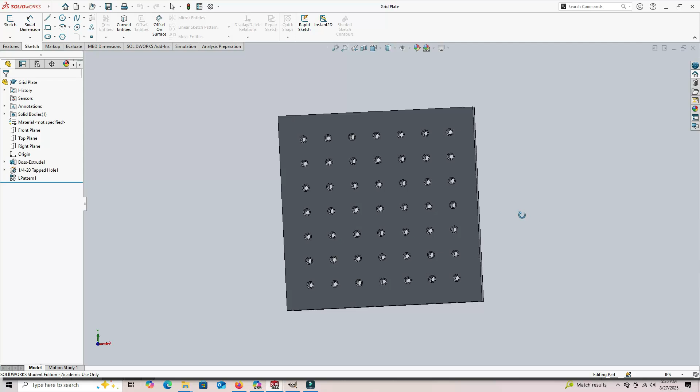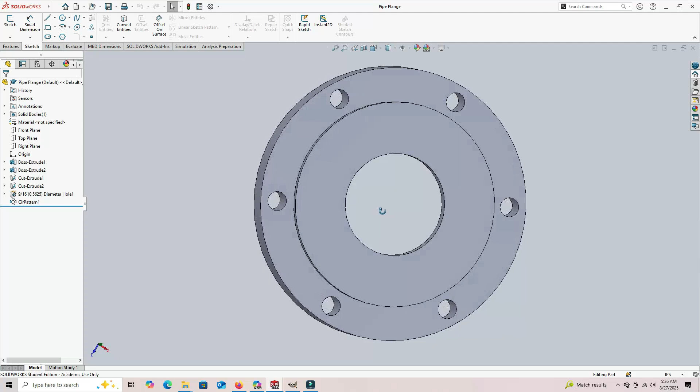Today I'd like to talk about linear and circular sketch patterns. This allows you to take one feature you've drawn and put it all over a piece in some repeating pattern, such as on this grid plate, or bolt hole circles like this. It's a fantastic tool, I use it all the time, and it's really quick to learn.

So let me show you how we start these parts from the beginning. I'm going to go back to our grid plate I showed you a second ago, come to my fresh sketch, and choose a corner rectangle.

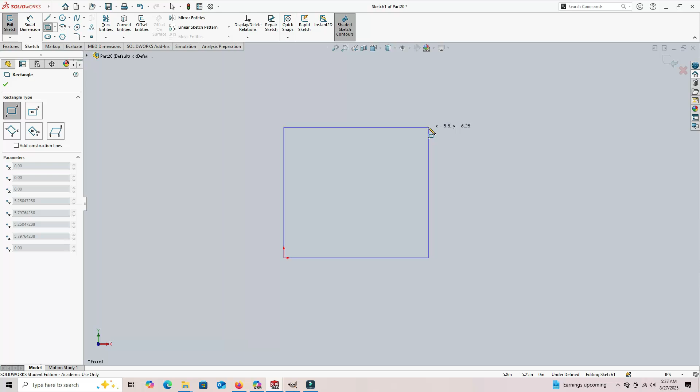I'm going to snap to my origin and come way out here. Actually, let me show you a quick thing. Let's say I make this about that size. My square that I actually want is 8 inches square, and this is coming in at a little over 5 inches. If I just type in 8 inches when there's a really large difference between the two measurements, it tends to keep the same aspect ratio on the part. So if you're way off on your scale, it really doesn't matter.

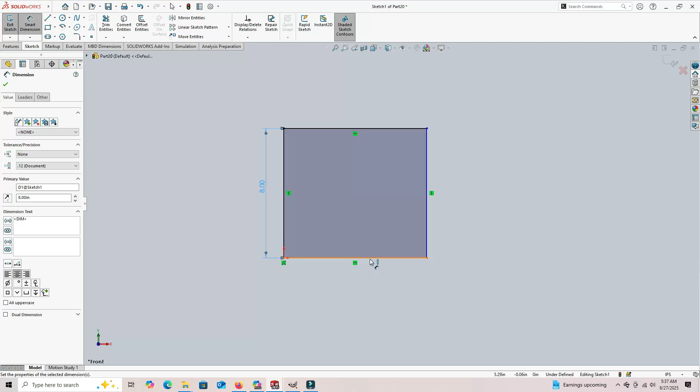And I'll come back down here and say 8 inches there as well.

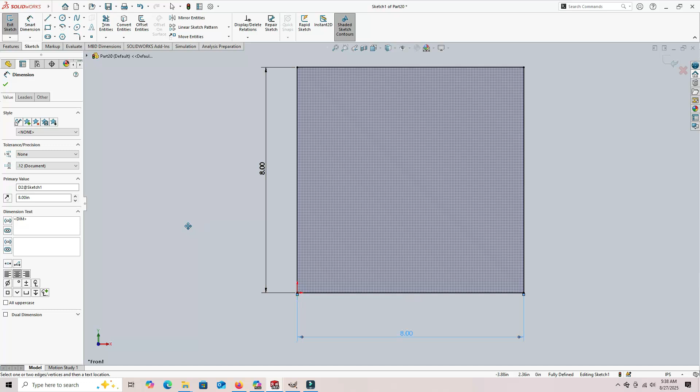Now, I've shown that you can pivot using your scroll wheel. I'm going to get normal to that view again using my orientation view. One thing I didn't mention in my first video is you can hold down the control key and click your scroll wheel, then drag it around in just one plane. So I can pivot it, or drag it in one plane. That's not important to this particular thing, I just thought it needed to be covered.

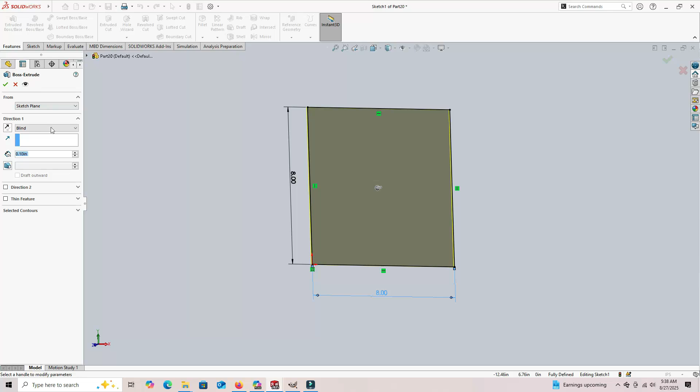Now I'm going to come in here to extruded boss base, and I'll make that 1 inch thick. That seems like a decent size. I don't actually remember what I put in the other one.

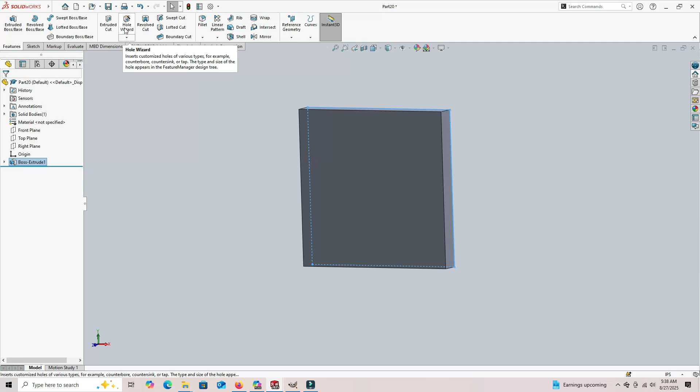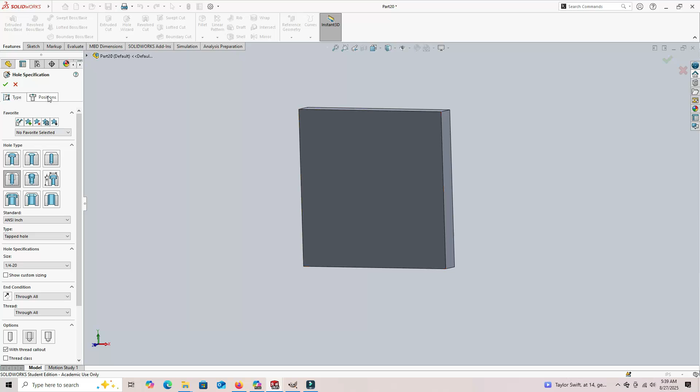Alright, now let's move on to the pattern part of this. First thing I'm going to do is use the hole wizard to put a single hole onto this face, and make that a tapped hole. There we go, we'll call it a 1/4 through all. This is everything we covered in the last video. I'm going to come to positions, and click that face.

I could easily put all 49 of the holes I had drawn on that grid plate onto this piece, but I could also save myself a lot of time having to dimension and place each of those 49 holes by just doing this linear pattern.

So I'm going to use my Smart Dimension tool and place the first hole 1 inch in from each edge. Now when I click the green check marks, I end up with my one singular hole.

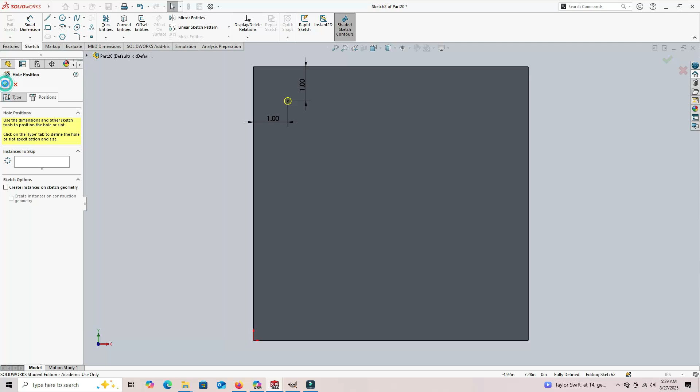Now I can come up here to linear pattern. This is also in the features tab, the standard interface just like I was in the last video. So I'm going to come up to the linear pattern. It asks for spacing.

In this case, I want the dimensions to be 1 inch in between. It's defaulting to the number of instances that I had last time, which is 7. And it's asking for direction, so you can click features, faces, or even planes to get this.

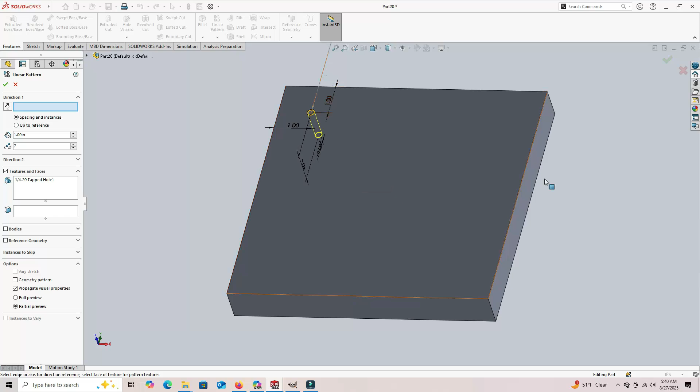This bit is a little confusing at first, because if I were to click this face, it would put my linear pattern going up off of that face. So what I really need to do is click this face here, and you can see it spreads out my holes in that direction. And then you also have a direction 2.

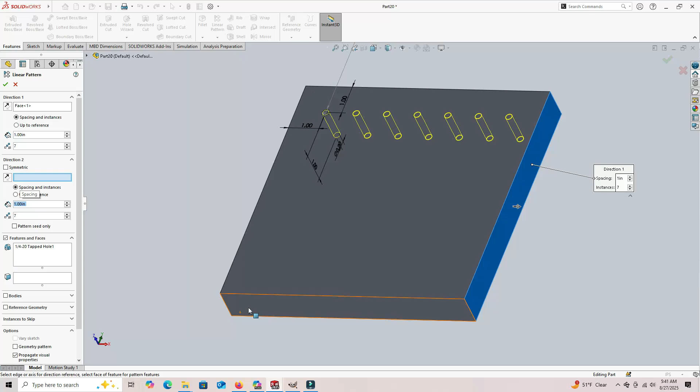So you can choose a separate spacing here. In this case I want a grid, 1 inch spacing just like up here, and 7 holes so I'll have an even spacing. Now for direction 2, I choose this face, and it will put all of my holes there.

Now there is no doubt in my mind that this was way faster than laying out all 49 of these holes and having to use Smart Dimension to put each one in its place in the hole wizard. I don't think anyone can argue about that.

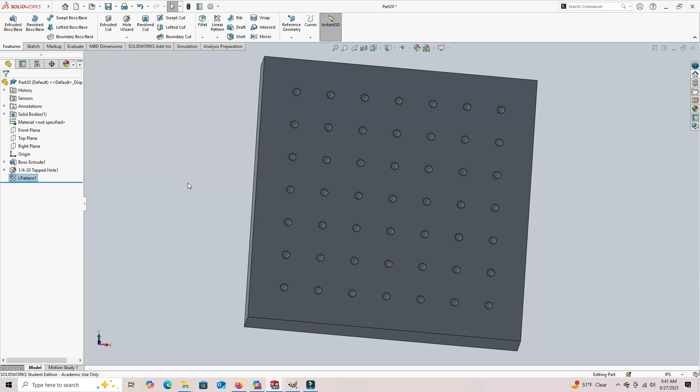If we look at my other part, the pipe flange, I want to point out a couple of other little things that might get buried in this video. It's not just about the hole wizard and the circular pattern in this case.

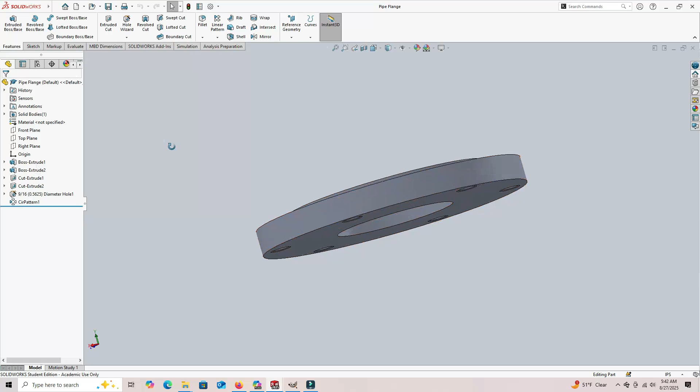I drew this part, as you can see from the tree, as several different extrudes. So I have my first one that shows the body of the flange, then there's this little boss that, if this was actually a pipe flange, would usually fit inside of a mating part to locate it and keep it from slipping around. Then I had a cut extrude to do the hole in the middle and a slightly larger cut extrude to do this recess.

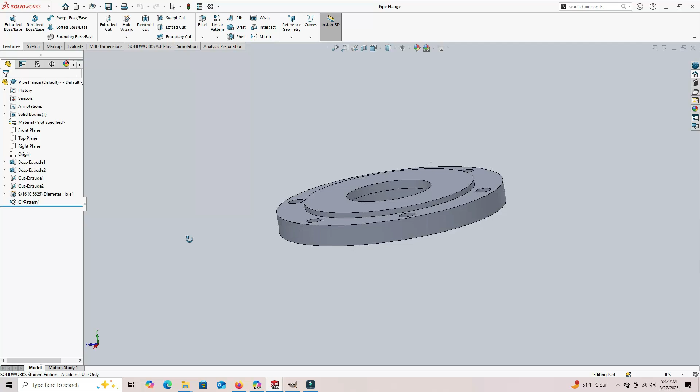And then I've got my hole that I did in the hole wizard and the circular pattern that you're going to see in a moment. Let me open up a new file, and I'm going to show you a slightly different way that you could do this.

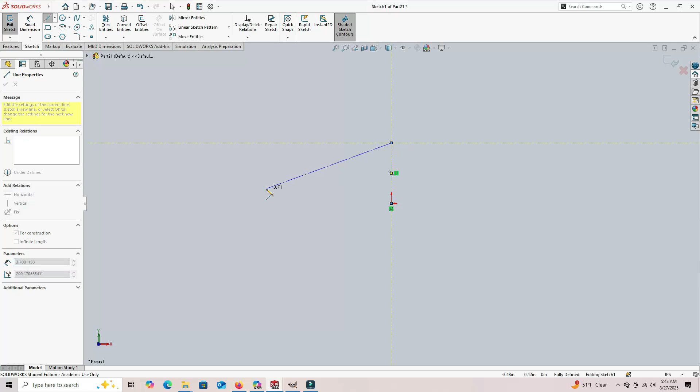So I'm going to go to my Sketch tab. I'm going to click Sketch. We'll do this on the front plane, why not? First thing I'm going to do is click the drop down next to Line, and I'm going to put my center line, just drawing it right about there. Hit escape to get out of that.

Center lines do not have to be fully defined, so I don't have to worry about that little blue dot up there.

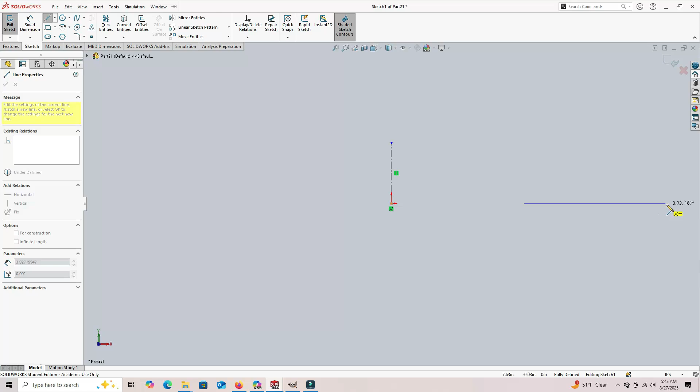So now I'm going to do the rest of this as a revolve. I'm going to start down here, and I know my part is probably going to be something shaped like this. I'm doing this pretty quickly because I don't have to be very accurate here.

This is what it looks like in cross section, and then I can Smart Dimension everything from these lines.

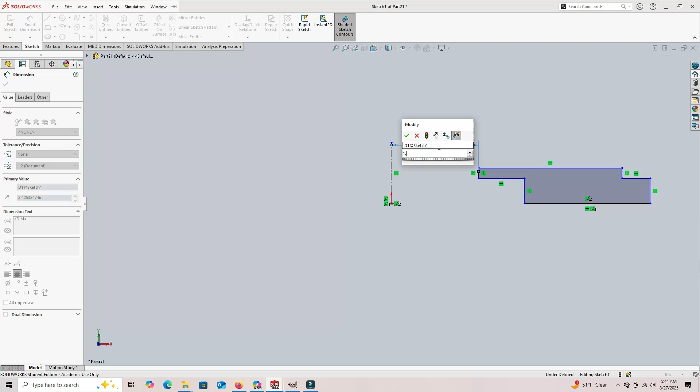So I know that, for instance, that feature on the radius is only 1.5 inches away from the center. That was a 3-inch diameter cut. This one was 3.5, so that would be 1.75 inches on the radius. This one up here was 6 inches, which I know is 3 inches. I don't have to do any complex math for that.

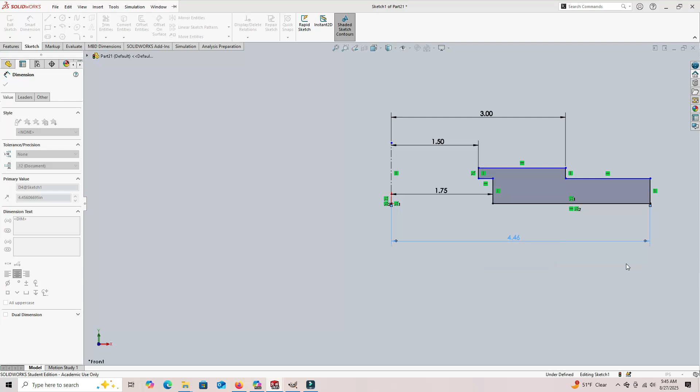If I did have to do some complex math, I know that this one's 8 inches, but if I didn't, if it was some oddball number like 8 5/8, I could type in 8.625 divided by 2, and it will do my math for me. You can actually get pretty complicated in the math. You can even add parentheses and all sorts of stuff. You can type in any math formula in there, as far as I know, and it will do the math for you.

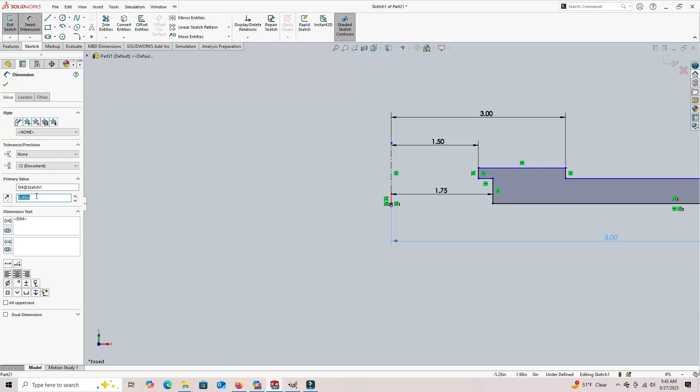I don't want that to be 8 5/8, though. I want it to be just 8. Oops, nope. I want it to be 4 inches.

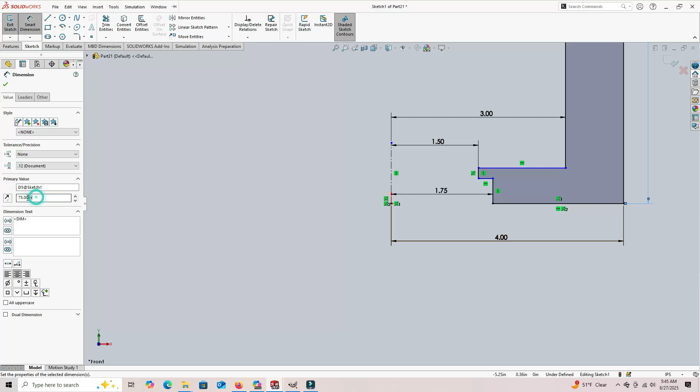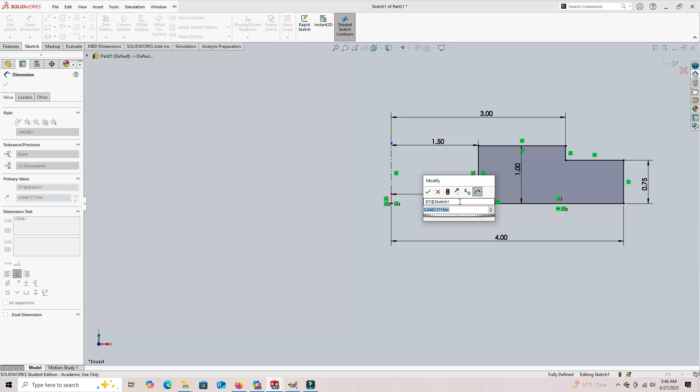So then we also have, let's see, I don't remember what I used for my dimensions here. I'm going to say that's 3/4. Oh, not 75 inches, 0.75 inches. There's a big difference there. We'll make this one 1 inch. And then, let's see, we'll make that be 0.75 as well. There we go.

So like I said, I can tilt this around, or if I wanted to, I could click my control key and drag it all in one plane. This is very handy to recenter the drawing on your sheet here. So I could really just drag it anywhere I wanted to, even down here where your like and subscribe buttons would be, I think.

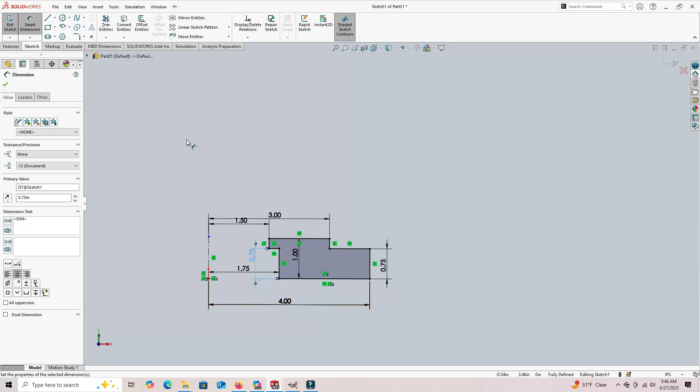Anyway, let's go ahead and go to Features. I'm going to click Revolved Boss/Base, and it's going to assume I want to use that center line.

So now I've got my whole pipe flange, really zoomed in, and I only had to do one operation instead of four different operations. I had one extrude, two extrudes, and then two different cuts for these guys.

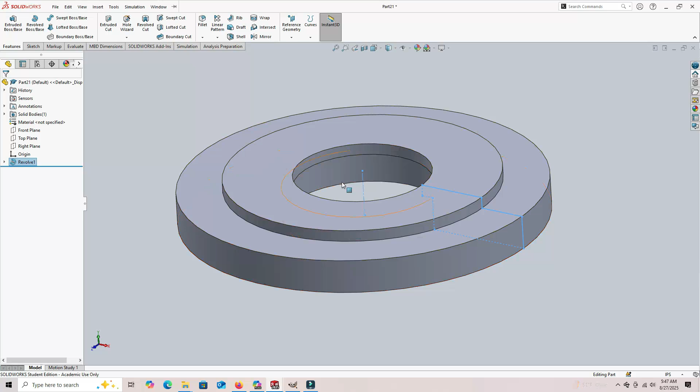Now I'm going to put my hole in here with my hole wizard. I just want a regular hole, and a lot of this is already carrying over from when I made my sample part. I want it to be 9/16 of an inch in diameter, which would be a clearance hole for a 1/2 inch bolt. I want it to go through everything.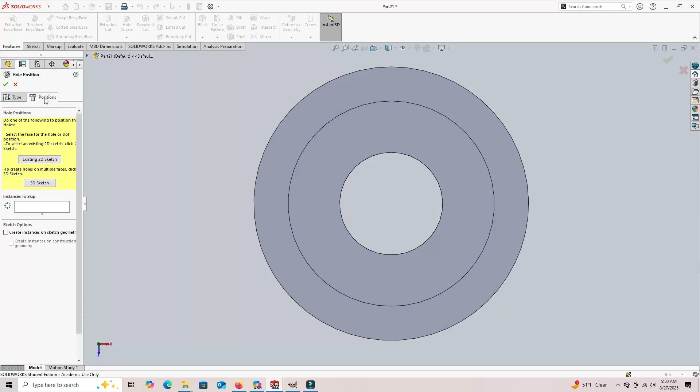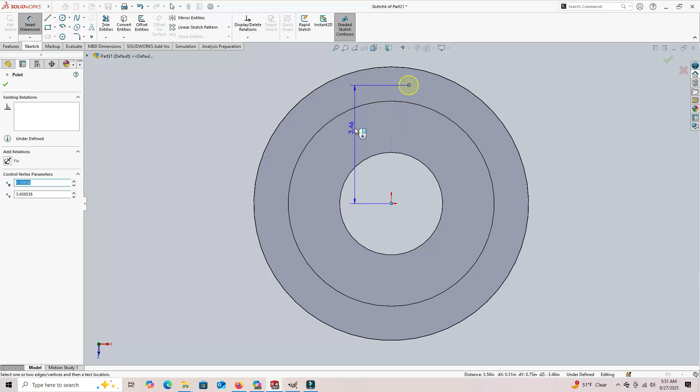Now I can go to Positions. I'm going to choose the face, and rather than snapping it vertical over the origin, I want to show you something—I'm going to put it a little off center, and the reason is because of Smart Dimension. Everything has to be oriented to the origin, and I know this is going to be 3.5 inches up that way. But when you snap something to the origin, it's difficult to put in the second orientation because there's no distance between the origin point and the point where your hole actually is. So I usually put it a little off center, then drag my mouse down and get this measurement, and from there I can just type 0. Then it'll snap it above the origin, nice and centered.

That's something a lot of people fall into—that little trap of snapping it right above the origin, and then they get into a pickle because they can't fully define the sketch at that point.

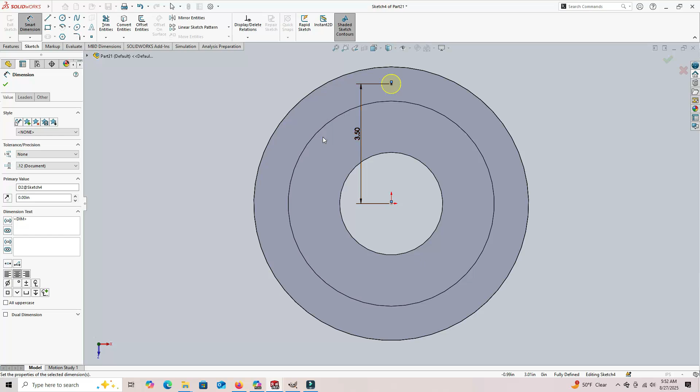So now I'm going to go back—actually I need to click my green check marks. It's going to give me my hole. There it is, yay.

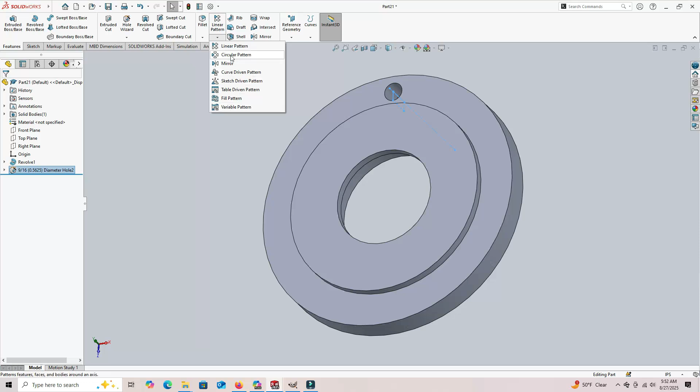Then I'm going to choose this again, and go to the drop down under linear pattern—you have all of these options. The one I want this time is circular pattern. It's going to assume you want to make the pattern out of the last feature you made. If you want to choose something different from the tree, you could come up here and choose whatever feature you want. It's also going to ask how many degrees you want to move around in the pattern. In this case, I want 360 degrees and 6 instances, left over from when I made my sample part. Up here, it's asking for the direction.

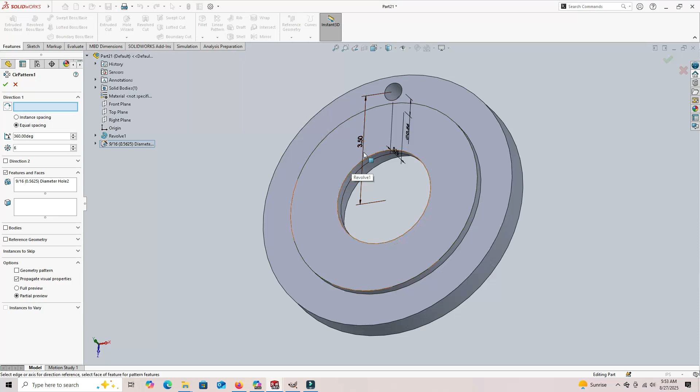Just like in the other part, you can choose any face or plane, but things get a little wonky with circular patterns, so you have to choose a circular face like this, and then it plops them all out there. If I delete that face, I'm not sure what it'll look like if I click this outer face. It still does it—okay, so you can choose any of those circular faces and it'll make your pattern around the center point.

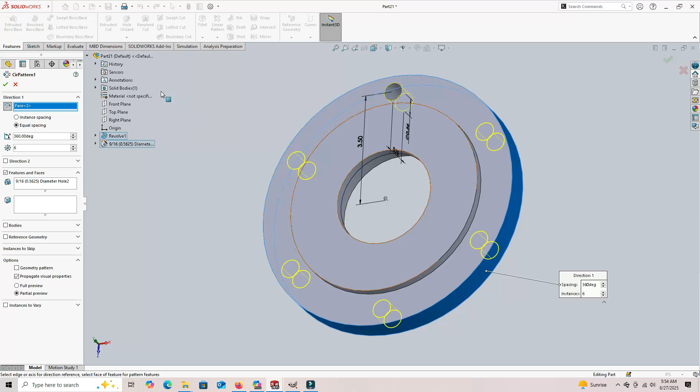I should be able to click go, and now I've got my finished part—and a lot of lag.

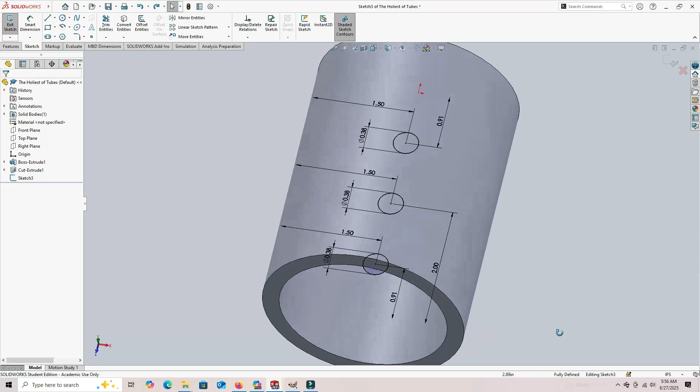Now I want to show you this other part I did. This is just a couple of extrusions—one for the outside and then an extruded cut to turn it into a tube. I've got a sketch right here of 3 different holes, and I'm in that sketch.

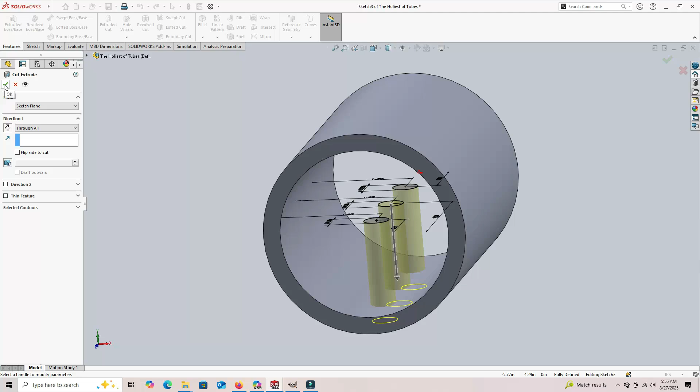I'm going to come to Features and hit Extruded Cut. I'm in through all, only one direction though—you do have the option of several different varieties, but I only want it to go through one direction because I'm going to do a circular pattern around the radius. So I'm going to click that. Now I've got the 3 holes coming out that one side.

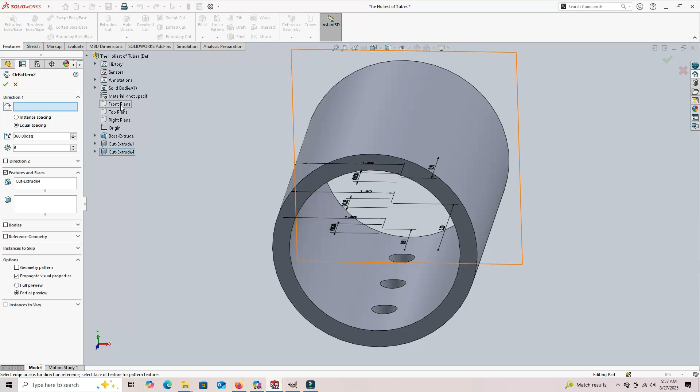And if I do a circular pattern here, I want 360 degrees, 6 instances, and for the direction I'm going to go to my tree and look for a plane. I'm going to do this about the front plane, and then it gives me a radial pattern like that.

This could be some kind of drain filter—I don't know what you would call it. There's no such thing as a typical part, but you see this kind of pattern a lot. That's why I called it the holiest of tubes.